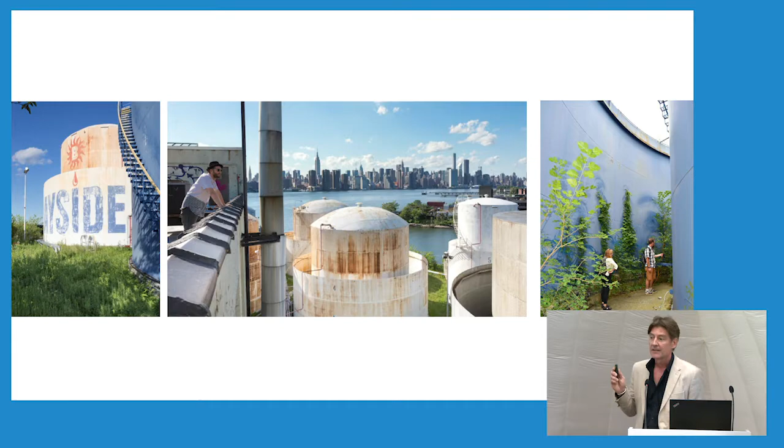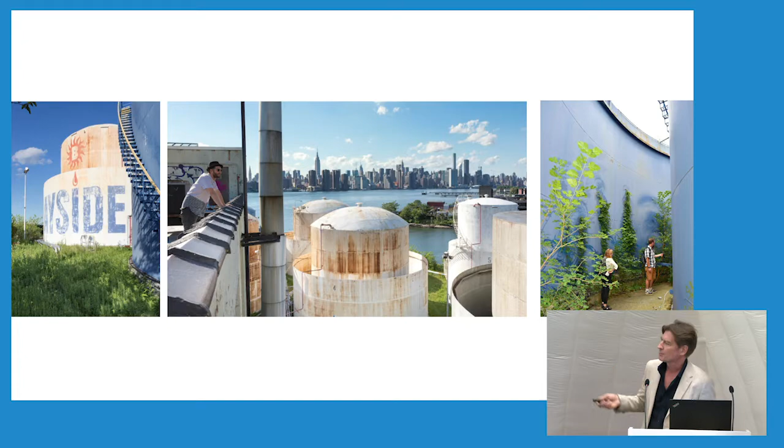The first thing we did was climb into the site. We had to break into the site and climb over the fences, all of these professionals clambering over the property, and we discovered this beautiful, overgrown kind of wilderness in the heart of New York City in Brooklyn.

But when we did some further research, we discovered that there were some interesting stories to the past, too. If you look on the left, it was not only the Standard Oil Works and the Bayside Oil Works, but it originally began with Pratt's Astral Oil. I love the kind of logo that says, 'Doesn't explode.' Charles Pratt, who founded this, was an early utopian industrialist. He was actually very well known for creating social housing for his workers. He was very unusual. And while he espoused a series of social goals, a man who was far more voracious lusted after this oil works and managed to purchase it from him. His name was John D. Rockefeller.

But Charles Pratt took the money from the sale of this site and used it to found the Pratt Institute, which accepted women and people of color, shockingly for the 19th century, an educational institution where people could afford to better themselves. So this site suddenly already had a history in transforming oil into something deeply philanthropic and different that was part of the public life of New York City.

Now, this neighborhood also had some challenges. Greenpoint was very interesting and in many ways a very successful neighborhood, but in some ways controversial. It had this wonderful history and character, small, funky shops, and the usual kind of neighborhood grain and feel to it, but at the same time, a rezoning, which was very successful, had built new housing, new affordable housing, and access to the waterfront. But it also resulted in these massive glass towers that some felt was taking away the kind of history and character of the neighborhood, even as it supported development that was essential for the city.

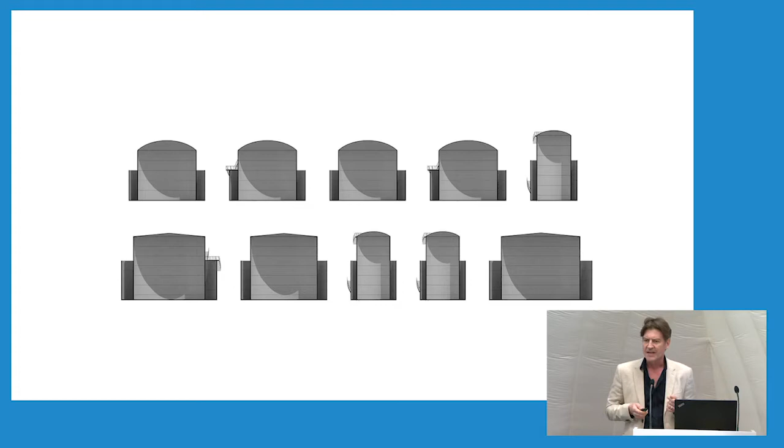So we thought, how could we engage these in a kind of design exercise and a vision to keep them, but repurpose them for something new? Our structural engineer, Thornton Tomasetti, determined that we could actually create a series of slices within them. They would maintain their structural integrity. We could cut the tops off.

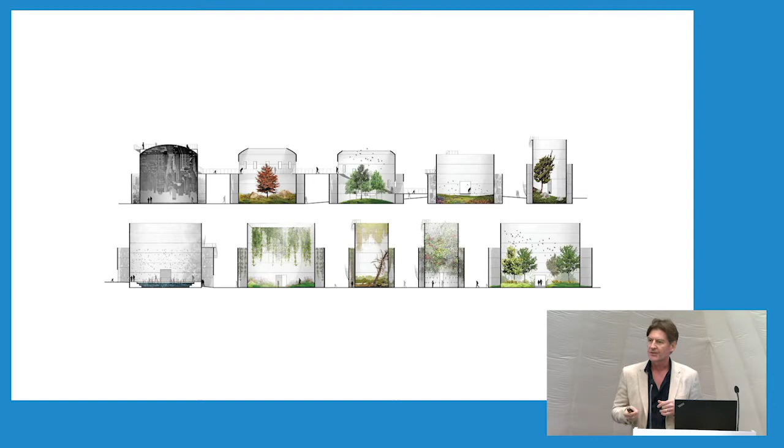And we developed this notion of filling them with soil. We worked with Ken Smith, the well-known landscape architect, and we found that we could create a series of gardens inside them, which would actually help bioremediate the site, but it would also allow us to create 10 unique circular gardens with an inner and an outer layer that could relate to one another.

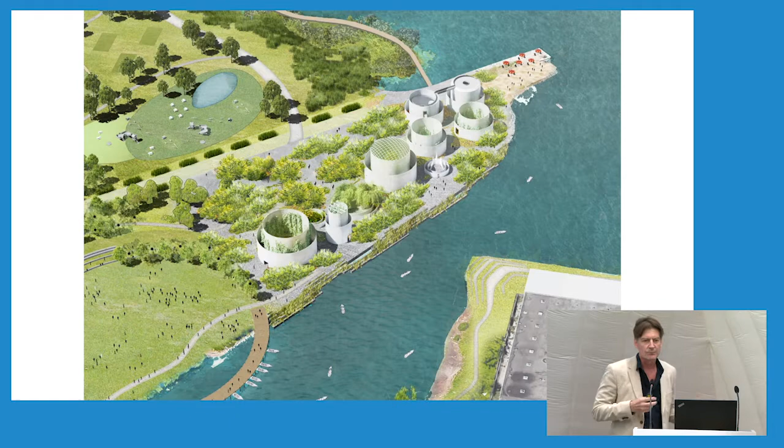And so our vision was to take a site that looked like this, with these 10 tanks - and this is just a portion of it. If you look at the larger design, which is even on the screen outside, we also included playgrounds and children's areas and boat launches. But we thought we could take this and transform it into a series of individual unique gardens that could each be special and change over time, but unified by an overall palette that would surround and connect them with a sequence through the tanks leading up to the edge.

So in order to help realize this, Pentagram developed our logo, we developed a website. We decided we had to reach out to the community and we had to work with people in order to try to make this a reality.

So we developed a whole series of brainstorming sessions, public meetings. Hundreds of people attended with the idea that we really needed to solicit input, and it wouldn't just be a fixed design, but we would work with the community to incorporate their elements into the design.

And even the formal notion of these 10 circular interconnected gardens suddenly allowed for variation and input. Maybe the design wouldn't be entirely fixed. Maybe we could create a framework that would hold the design together and make it work in the long run, but certain elements of it could change over time.

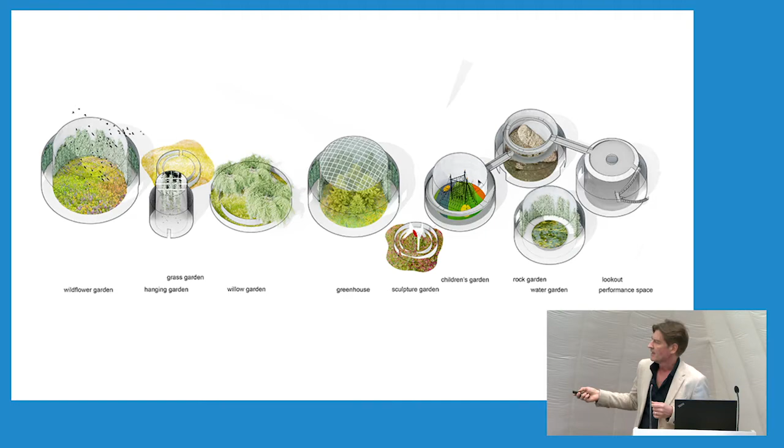And so we could develop these different components where we could have different gardens, different cultural elements incorporated into it, performance spaces. So we developed each of the different tanks in a different way. The first one is a grove of trees with wildflowers for having picnics in it. The second one we filled with water and grew vines around the edge in order to capture the reflections of sunlight. The third is an adventure playground, but filled with the works of local artists from the neighborhood.

I remember in some of the community meetings, one man came up to me because the project was controversial. He said, 'Why would you want to put children in one of these industrial structures?' And I said, 'Sir, do you have children?' And he was horrified. He said, 'No.' And I said, 'I have kids and I've raised them going to public parks in New York City, and they would be the first ones that would want to go inside this tank.'

So we had to also deal with controversy because some people from the community felt that we should wipe the site clean, that the tanks were a bad memory, that we should remove the industrial past. But the more we worked on the project, hundreds and hundreds of people came out to support it and to suggest that we should do something else.

So the story goes further. As we tried to work with the community, we found another group that was interested, called the Billion Oyster Project. This group was founded by Pete Malinowski in New York City, an incredible group dedicated to teaching children maritime skills, but also taking oyster shells from New York restaurants, repurposing them and trying to rebuild the oyster reefs in New York harbor, which was originally one of the most profound oyster habitats in the entire world.

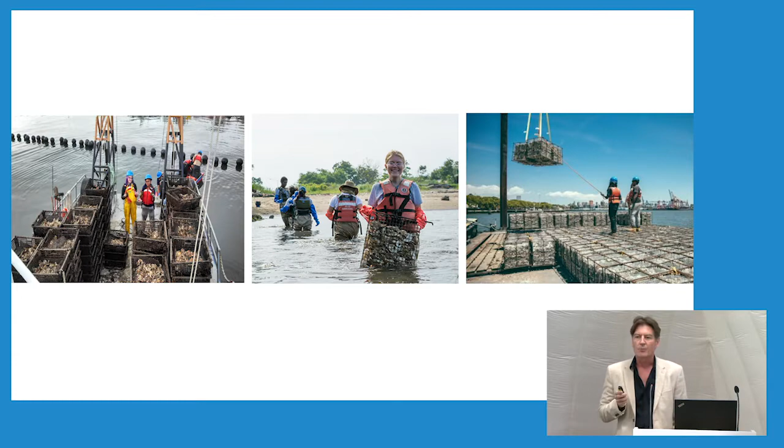One thing I noticed when I talked to Pete was they had about 10,000 gallons of tanks where they would grow their baby oysters. And I said, well, we have a tank here that's nearly 1 million gallons. Maybe that would help you in your goal to restore the New York harbor by 2030, to get 1 billion oysters where they start to become self-replicating and start to create the reefs and protect the city through resiliency.

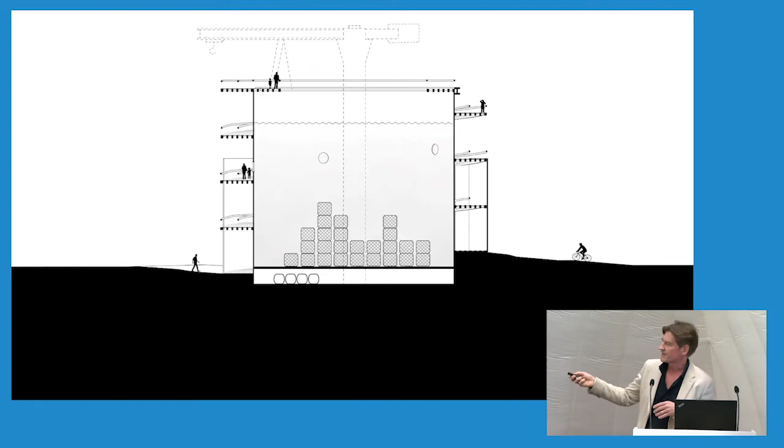So we said, what if we create a real oyster farm, but make it an example and a story where it becomes a public pavilion that tells the story of how we depleted our original habitat of the harbor, how we destroyed one of the most incredible oyster habitats in the world, but also tells the story of how we could work together to recreate that.

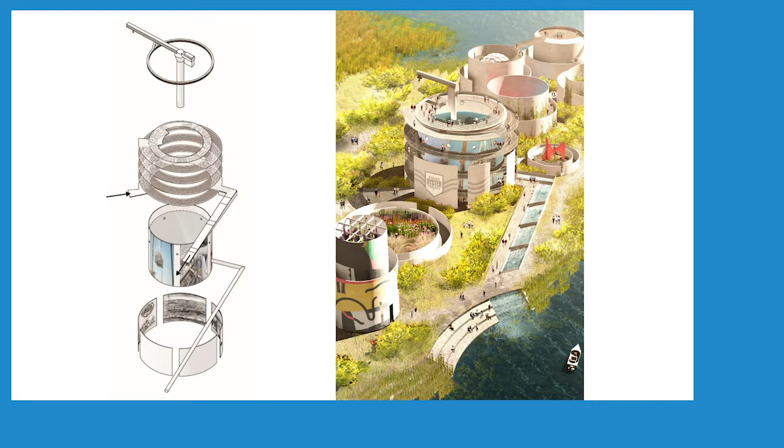So we developed this design, which I like to call the Guggenheim of oyster tanks, where we created a completely accessible ramp that would spiral around the tank, allowing a series of portholes where you could look into the interior and see the oysters growing. School children like mine could come here and see this, ending in a platform at the top with incredible views over the skyline of Manhattan.

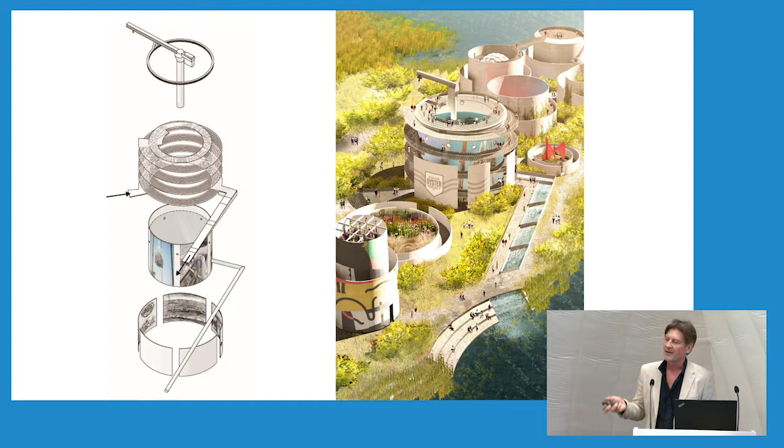And then finally, the inlet itself is one of the greatest oyster habitats in New York City. The inlet is particularly well suited to growing oysters. They had 35 research stations, and one was located here—it was one of the best locations. So we take the baby oysters and bring them down the waterfall and implant them back into the harbor.

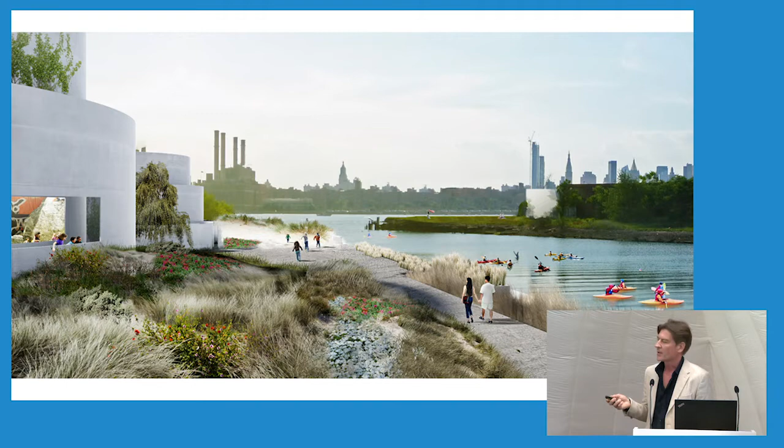This last two views show the overall aspect of the park, where we bring together all the different activities. We created native wetlands surrounding it, with a series of mounds of grass and native plantings that would act to restore and bioremediate the oil in the ground at significant savings, allowing the park to happen quicker. Our environmental report shows digging it all out and exposing it to air would cost about $220 million, but bioremediating in place would cost about $20 million—about a tenth of the cost.

Working with others—graphic designers, scientists, landscape architects, ecologists—can we work together to create projects that perhaps rethink the way we do our cities, restore our habitats, protect them and make them more resilient? Can we perhaps come up with a new kind of park where we can play a role with others to help achieve that? Thank you very much.

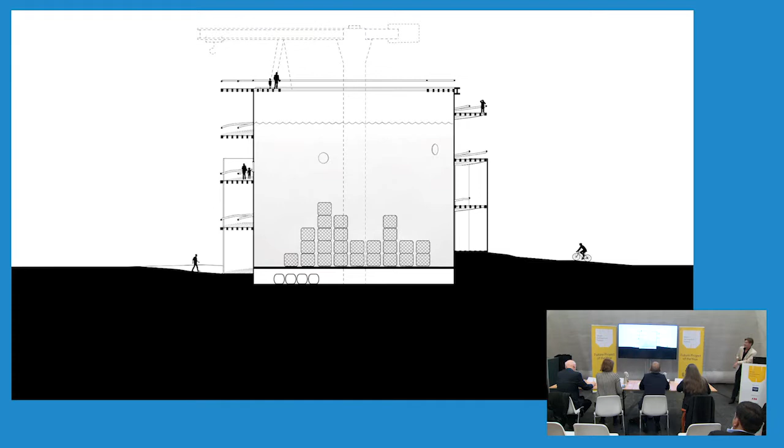This is one of the biggest ones. Yes, so we chose one of the 3 largest ones. They tend to be somewhat similar in height—the overall height tends to be about 60 feet, and the overall diameter to the outermost component is also close to about 70 feet.

So that gives you a little bit of a sense. They're about 6 stories tall.

Another very pragmatic question: who's the owner? The owner is the city of New York. The city is looking to create a vision for this and hasn't decided yet how to design the park. In the course of our doing the design, the city finally completed the acquisition of the site, and now they own it, but they have not yet decided on the design of the park.

Do they listen to you? They listen to us, and they are looking to try to find a way of consensus, because the city is always afraid of anything that is controversial. So for us, it has been helpful to publicize the project, to take it out. We've created a website, savethetanks.org, to really get the message out, which helps us build support to realize this vision.

I love the project, but is there more people competing about this, or are you the only one? The city hasn't released a design for this site yet, so there is no competition, but there is controversy within the community. I must be fair about that. We found that many of the younger people and the creative people within the neighborhood love the idea and actually support it, probably in far larger numbers.

A friend of mine who runs community relations has told me, oftentimes the people leading the political organizations are an older guard. Some of them feel that they've waited a long time for the park and want nothing more than to tear the tanks down, and they feel that replacing it with just plain grass or open space would be better. That would be a pity.

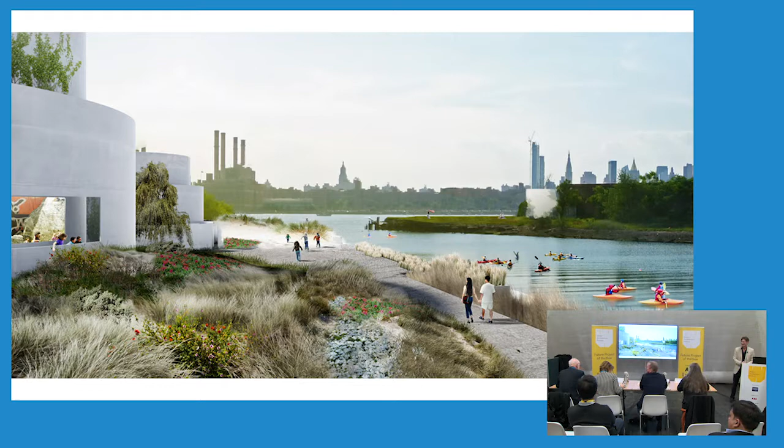I'd never met you before, but you're the sort of guy who's canoeing upstream when everybody else is canoeing downstream. You may be an architect, but you're essentially a professional guerrilla, aren't you? You've mobilized everybody else, and then you've legitimized the process through the charrette. And now you're going to get this project over the line, we all hope.

Well, there are a series of organizations in New York, and of course there is an example like the Friends of the High Line, where they create a public organization in order to maintain a structure. We've had a tremendous amount of help and outreach from other people who have founded nonprofits. There's also the Pratt Center, which was originally — and they haven't agreed to this yet — the Pratt Center is a community organization that is parallel to and separate from the Institute. So part of our hope would be, because of their legacy with the site, to involve them in assisting us, because it matches some of their goals too.

Thanks. It's a wonderful project, and it's really great to see advocacy at this level. I'm intrigued by the whole idea around memory and architecture, because for me that's where the architecture lies in this. So what is your approach to the memory of the oil tanks?

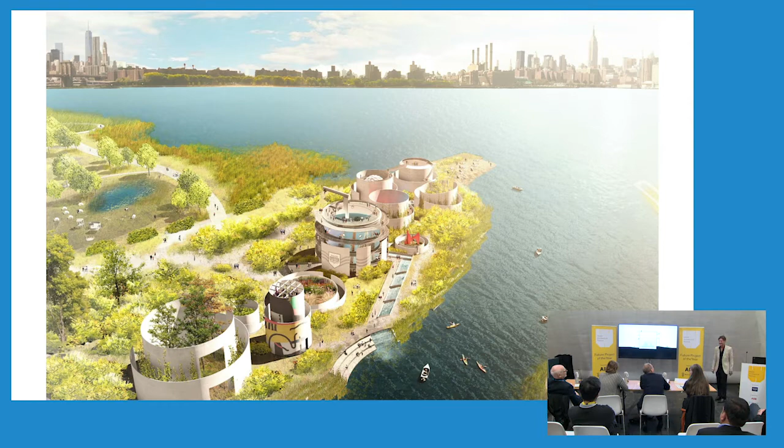Maybe it would be nice to keep one in its original condition, perhaps. Yeah, I agree. Thank you very much.